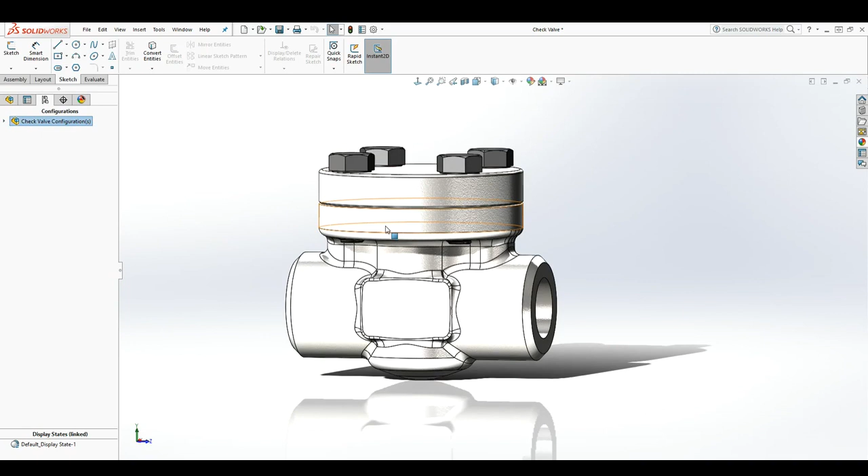In this lesson, we are going to be working on how to do our exploded animation. So to start, let's go into motion study. To do an exploded animation, you always have to have an exploded view in your assembly before you can do it. When we were working in the assembly for this valve, we created an exploded view for this valve. So now we can do an exploded animation for it, because you can't do an exploded animation without having the exploded view. So that's the first thing to keep in mind. Make sure you have your exploded view.

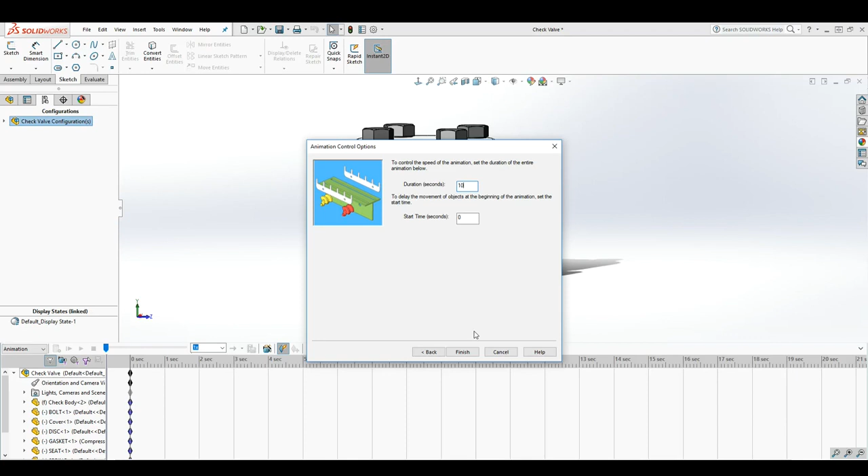So now when we go into the animation wizard, we can see this explode view option is on. So we'll click explode view and click next, and for the duration, we want the exploded view to last 10 seconds, and we want it to start at 0, and we'll click finish. So now SolidWorks has automatically added those keyframes for the different steps in our exploded view.

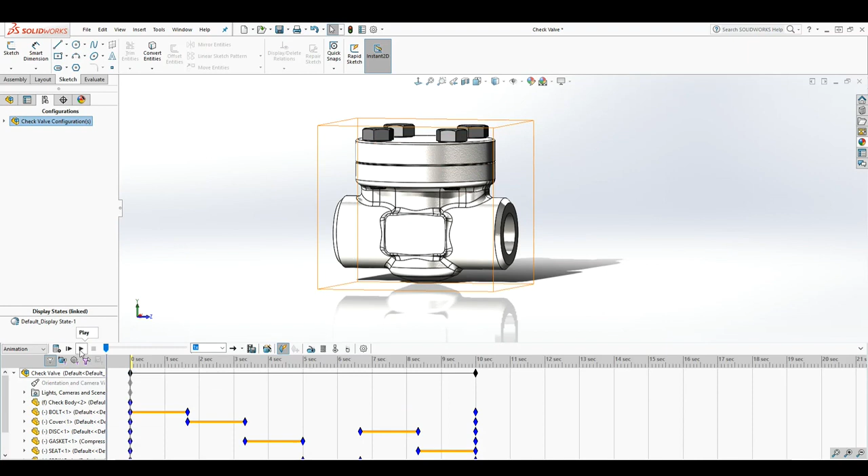Before we play, let's right click and press disable playback of view keys. So if I click play, we can see that our valve is exploding, and all those parts are exploding, which are the steps we did when we were working on the assembly.

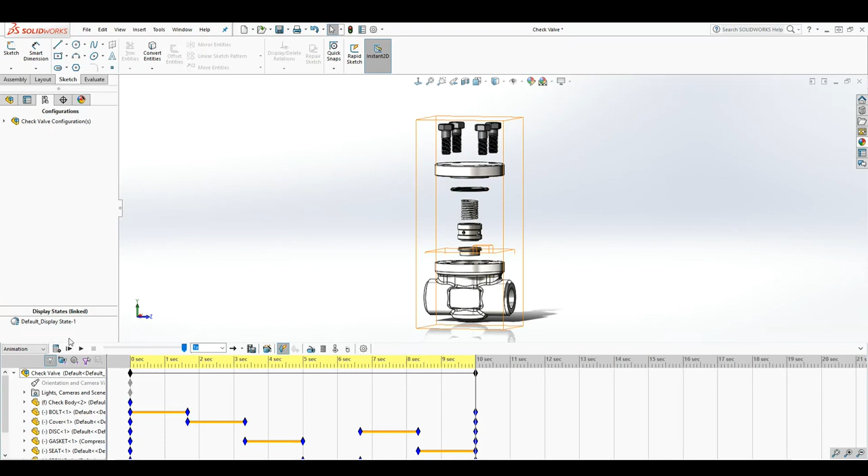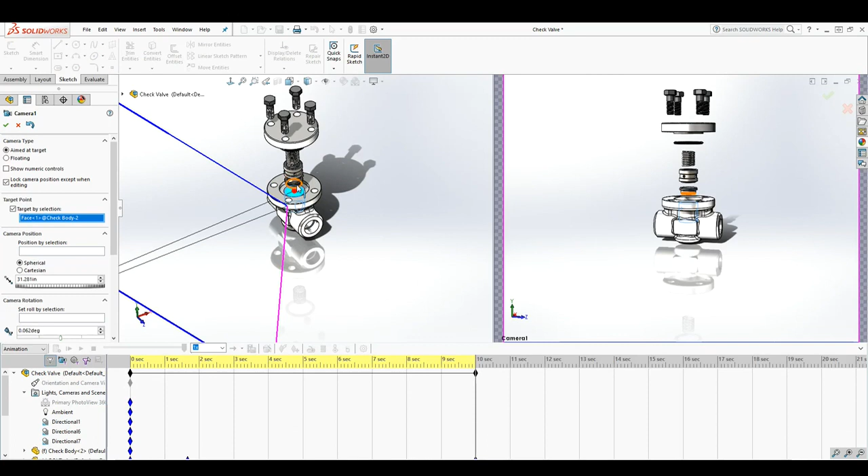So the next thing we can do is add a camera. Let's come down to lights and cameras, right click, add a new camera, and move the target. Like I said, the first one is the target. The target is pretty much anywhere you want it. So let's select something. We can select that and zoom in, and maybe select something so it's centered. If you want, you can also add your part to it.

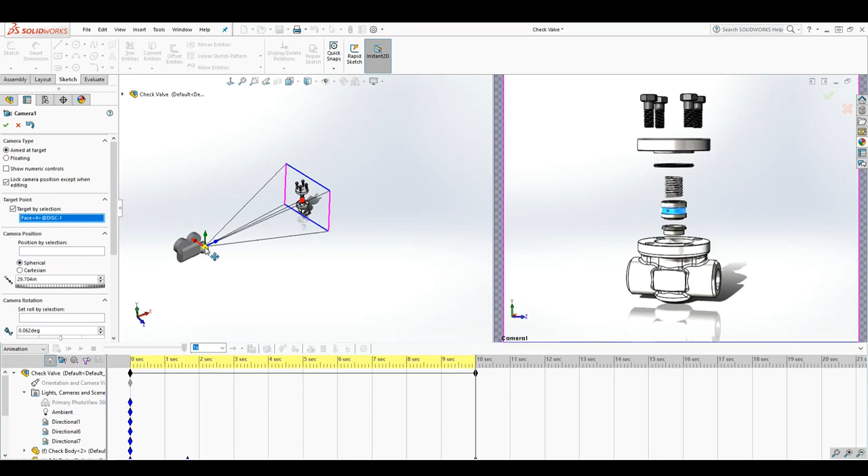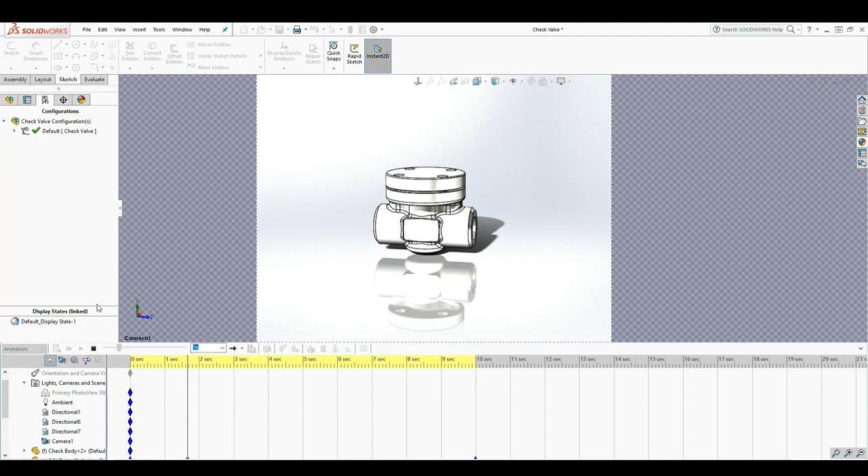You can move this, and you can also use this gizmo to drag it back and forth. So I can use it to move it left and right, back and forth. It's a good way to control your camera. So we have something like that, and we'll click OK. So let's play again, and we see our assembly is rotating.

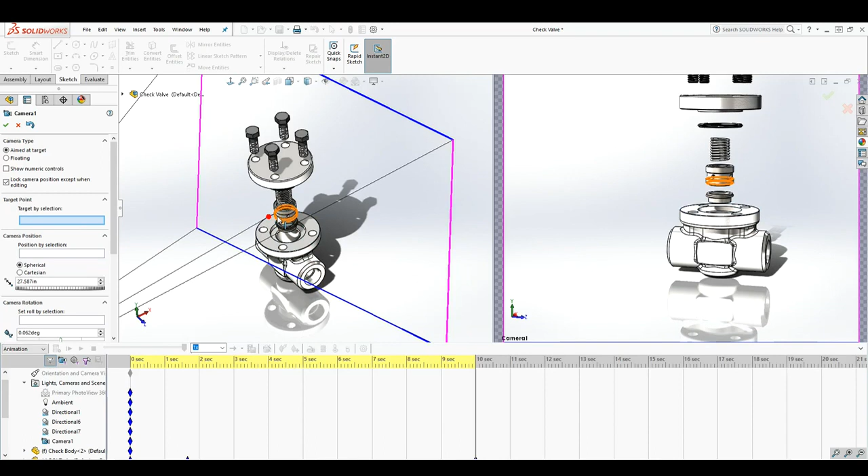We might have to work on our target. So let's right click on the camera properties, and for the target, let's select the body. No, let's delete that body. I'm looking for a view that shows the entire explode view. So maybe I won't select anything, I'll just leave it somewhere right here, and I will click OK. So let me play that again.

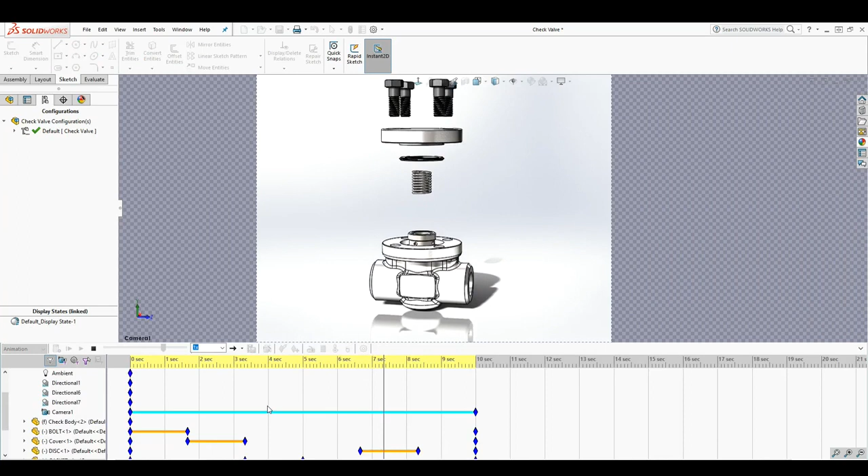Our camera is moving, and I'm glad this is happening. See, my timeline was on the 10th second when I edited my camera, but if I go back to my first camera, my camera's position is different at 0 seconds and at 10 seconds. So what I can do is right click, copy that keyframe, make sure the timeline is on this, right click and press paste. So now my camera is the same.

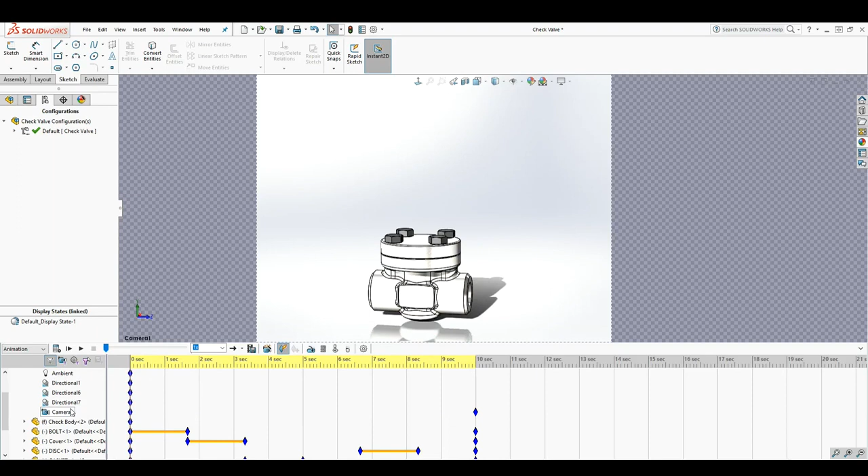So when I play that again, now you can see the view is falling under my explode view the way I want. So that is pretty much how you do an exploded view animation, and we can save it. You can name it explode view.

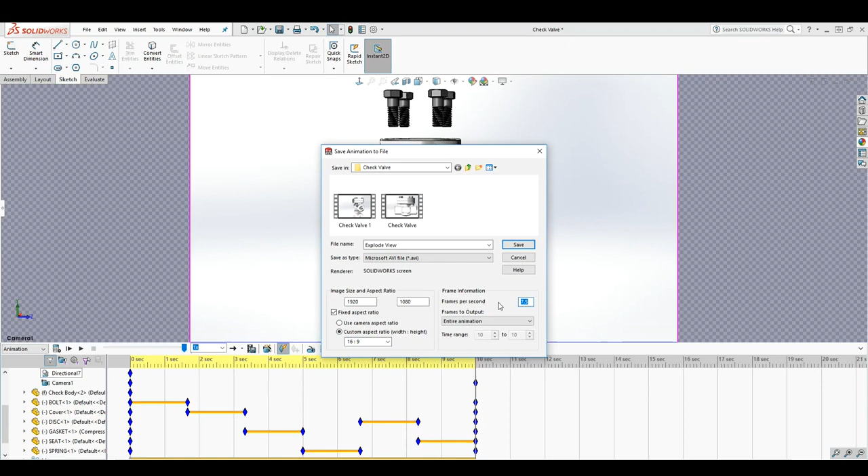This is the option where you can select different file formats. We'll render it as Microsoft AVI, and if you have PhotoView 360, that option will be available under the renderer. For our custom camera, we can select 16:9, and we want to render it at 25 frames per second. We'll click save, click full frames uncompressed, and click OK. Then we want to recalculate, yes.

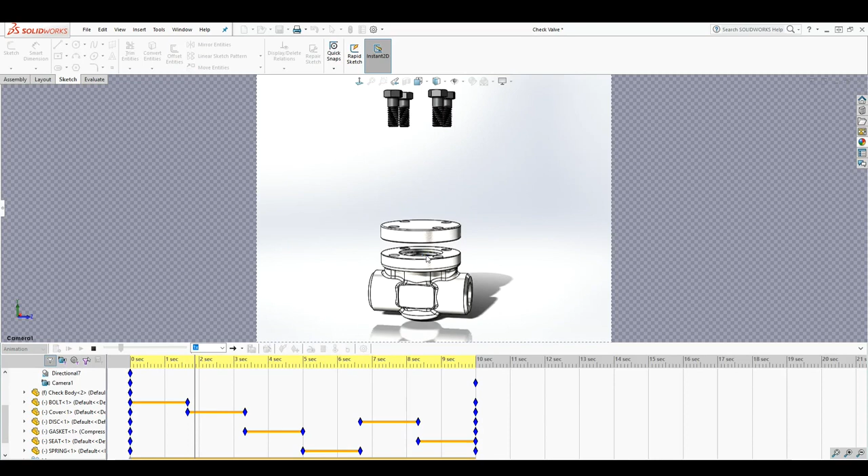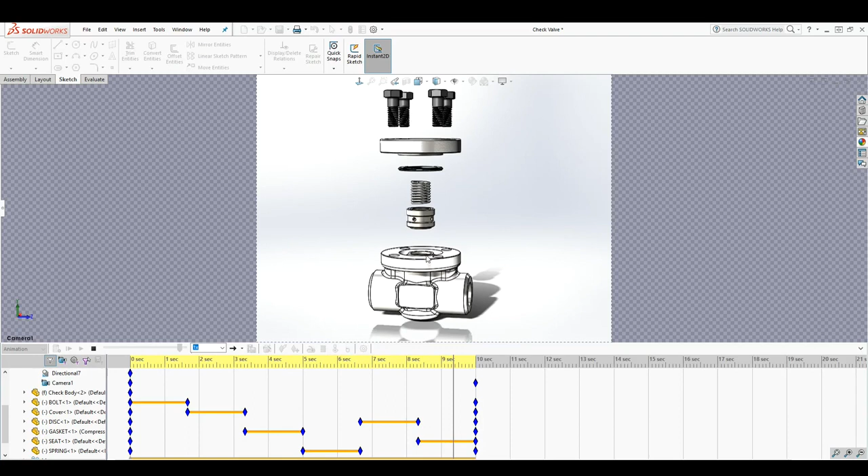So now our animation is saving, and it takes time to save. If you're rendering it in PhotoView 360, it would take even longer. Once this is done, I will show you what it looks like. Just a second. It takes a little bit of time to render. It's almost done. There you go. So if I browse to my file location and click on my explode view, there goes the animation.

And that is how you do your explode animation in SolidWorks.